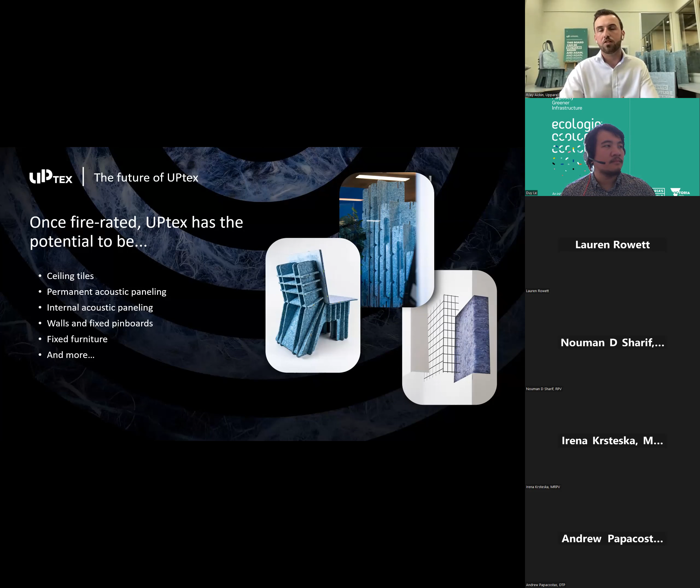If you'd like to use UPtex, it's imperative that you engage us in the early stages of your project, such as the design phase, so that designers and engineers can understand and spec this sustainable alternative to traditional materials, and so that we can deliver UPtex that is suited to your needs. More UPtex in circulation means less textile waste going to landfill, so please get in contact via our website so we can work together on your next project and support the circular economy.

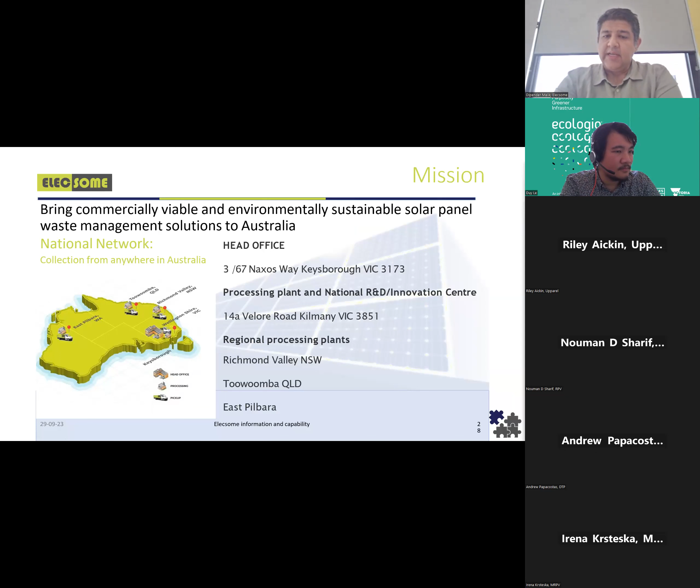So this is the roadmap for Elecsome. Right now we've got the first plant coming up in Kilmany, which is going to be an R&D and innovation center. But we are already in the process of finalizing land in a few other states so that we can have a better network of collecting all the end of life and damaged panels, so they can be reprocessed and the material can be used in a better way and be a part of sustainability and a circular economy. So these are the proposed locations where the plants are going to come in.

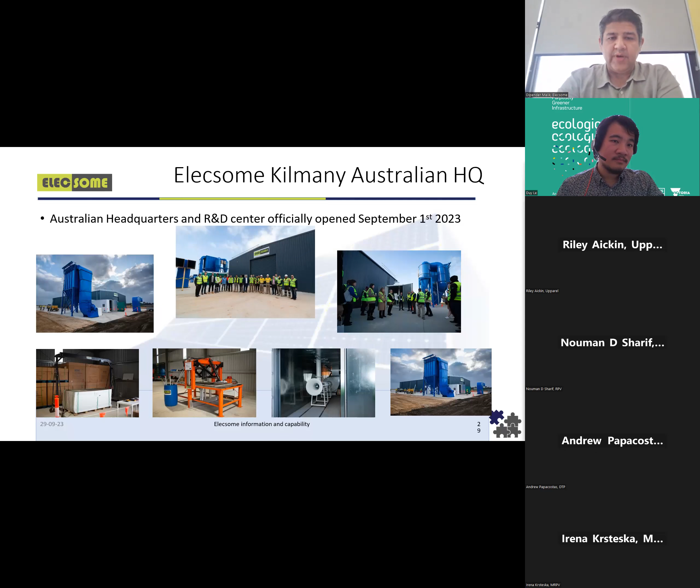In the background, the big blue machine is a vortex system. We put in the solar panels, and it works on a pressure, shockwave, and cavitation process, disintegrating the glass on the solar panels into a fine glass grade sand, which could be used in concrete production or a pre-mix concrete plant. This is the first part of our plant, but in the coming months we are putting up our own dry mixing batching plant as well, which will be producing pre-mix concrete bags for the community. Next slide, please.

In the whole journey for Elecsome, we have partnered with RMIT as well as the University of Melbourne, who have done our initial testing for the product and also for the concrete mixes we should be running.

During this process of putting up the plant, the whole process is around creating local jobs as well, because the region where we are putting up the plant is the same region where all the thermal power plants are coming down. We can get a lot of people who have worked around those plants, and we are trying to re-employ them in our business and train them to be a part of the Elecsome journey.

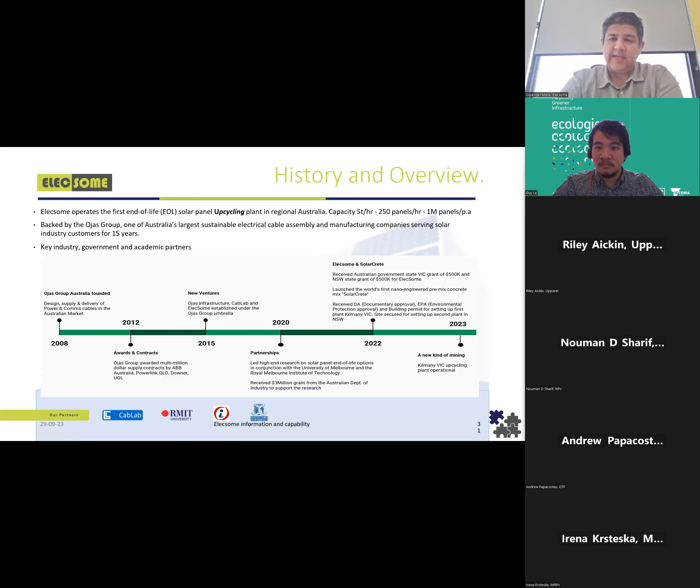There is nothing at this stage being done for end of life or damaged solar panels. Most of them used to go to landfill, or only the aluminium that forms the frame of the solar panel was taken out. The rest was just stored in containers or warehouses. Next slide, please.

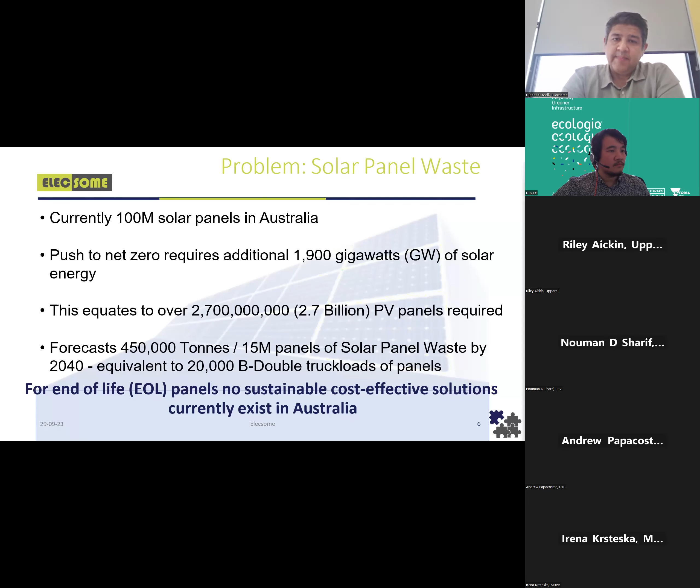How Elecsome comes in is we will have nationwide collection points in every state, and we will transport those panels to various locations where we can upcycle them. Only the Kilmany site in Victoria would have a dry mixing batching plant, where we could produce Solarcrete as a bagged product for the community as well. Next slide, please.

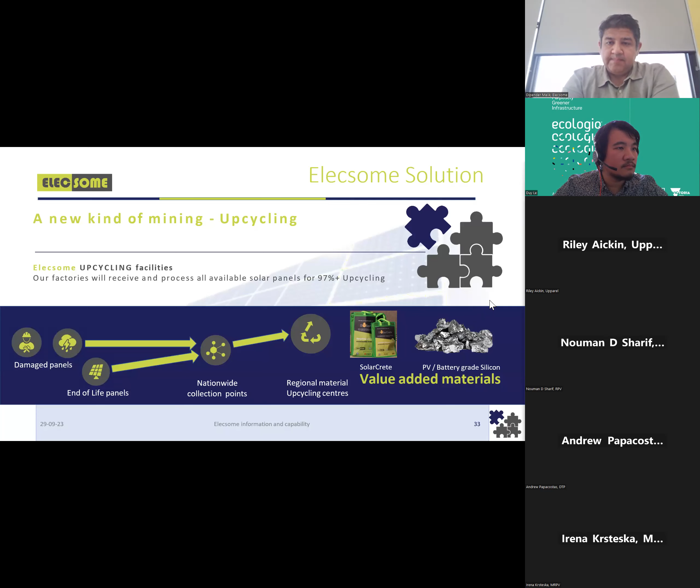At this stage we are in an R&D process with RMIT, looking at a chemical separation process where the solar panel is dipped into an ionic liquid so the glass separates from the panel. We can run this glass through the vortex system to convert it into glass grade sand, and through the chemical process we can recover copper, silver, which are high value items, and silicon from the panels. Most probably in a year's time we'll have a second warehouse at the same facility to start the commercial process there. Next slide, please.

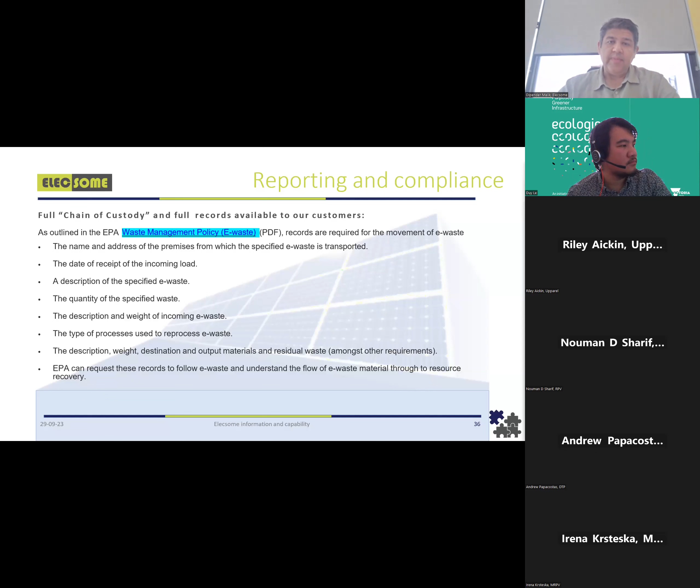Because we have a lot of contracts coming through from solar farms, this is the whole e-waste process, where we've got a waste management policy. We scan each and every panel coming through the gate and record what has been done with it. We have solid quality assurance that panels coming from solar farms or end of life are not ending up in landfill, and what they have been used for. That's the waste management policy for Elecsome, which is already in place. Next slide, please.

And then we will be having the full custody reporting for EPA requirements for any big project: how many panels have been received, how they have been recycled and how the material has been used. Next slide.

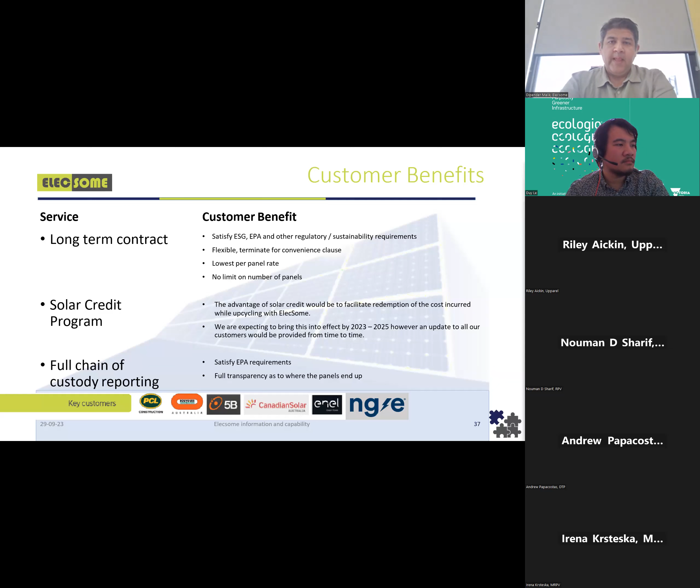And the first part is, at the facility right now as well, we test each and every panel which comes through the gate, whether it could be reused. So you can see these pictures when we are processing and looking into the panels. Whichever are the good panels, we are already installing at our site to have our own power generation through a small solar farm installed at the site.

Next slide, please. This is the team involved in the whole journey for Elecsome, which started from 2020 to 2023. Yeah. Next slide. Yep. Thank you.

Thank you, Dipender. Yeah, I'll open up with Nouman. I think fastest there. Thank you. I want to hijack this conversation with the question and answers, but a couple of things, Dipender. Thank you first for presenting. Yeah.

Now, solar panels are, of course, a piece of technology, and there will be technological updates happening. Assuming that for the next 5-10 years or whatever time period, you've got the supply of existing solar panels available in the market, which have been used on projects, etc. So one thing to think of is, of course, the future proofing of your company and the products that you'll be able to produce.

The other thing I'd like to mention is what we've experienced with a lot of infrastructure projects: if they are in regional areas, the supply of such products typically becomes an issue because of the distance. If you're saving on one aspect, then the transportation costs are too high, or your carbon emissions because of transport are too high. Hence, the product isn't feasible anymore. So that's just another food for thought, to strategically place your manufacturing facilities in places where you have that pipeline of projects.

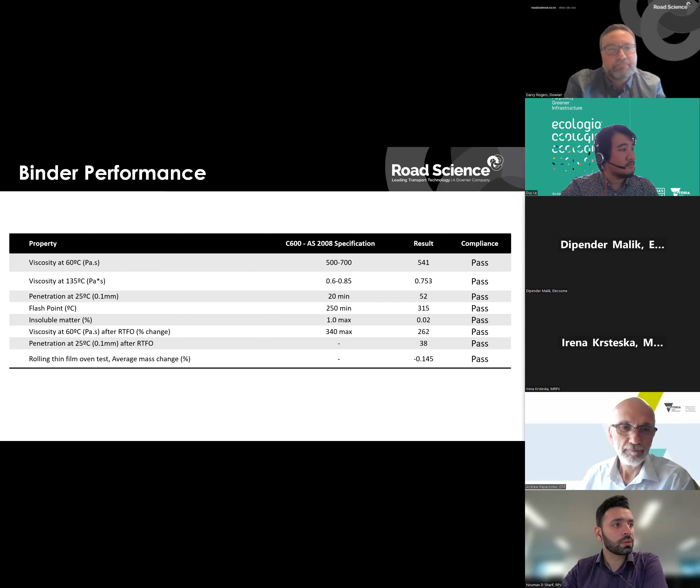In terms of asphalt performance, it essentially gives us very similar performance in terms of rut resistance. There's two tests we focus on in terms of looking at how it performs when it goes into an asphalt mix. One of them being rut resistance, so that's essentially having a loaded wheel pass over the mix we've created, and measuring how deep that deformation occurs over time. So the higher the result there, the worse performing it is.

In terms of fatigue resistance, I kind of consider fatigue resistance to be, I call it the plastic ruler test. So you think about if you're at high school, you had a plastic ruler sitting there a bit bored in class, you bend it many times, this thing snaps. We kind of test the same thing with asphalt. So if you put a layer of asphalt down on the road, vehicles are going to drive over top of it, it's going to flex that layer of asphalt, and eventually it will start to crack and break.

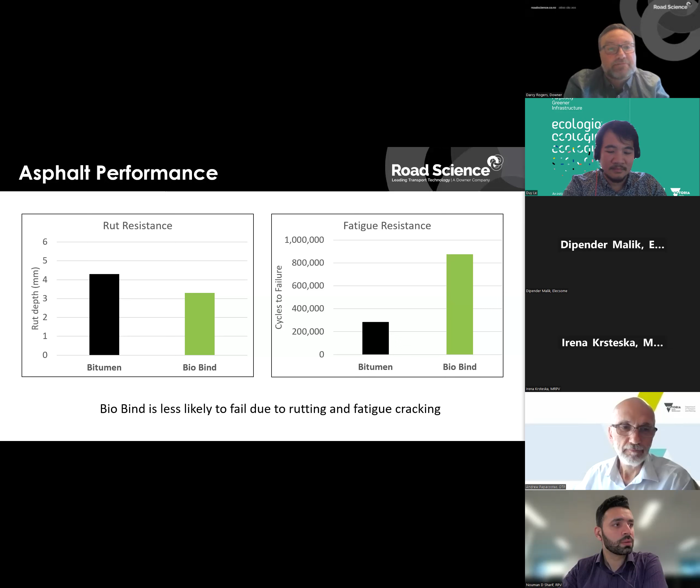In terms of carbon emissions, so I'm not sure why I keep skipping. There we go. That's all right.

Obviously, it's something we're still working on to finalise and get a proper EPD sorted. Based on our initial internal analysis, a ton of biobind would offset roughly around 2 to 3 tons of bitumen. So one of the key things in here, we're trying to pick raw materials that act like carbon sequestering agents, where it actually captures carbon through the growth of that plant material. And then we're using that waste to actually produce our binder. So these are subject to change, but just to give you a rough idea of where we're sitting in terms of reduction in carbon emissions, we'll be offsetting 2 to 3 tons of bitumen for every ton of biobind we use.

Obviously, it being a very new material, there's also some health and safety concerns that go along with it. We have completed leachate and fume testing with it. And I guess the key thing for the Road Science brand is, we've got some really smart people who can develop materials, but we also have some really smart people that can grow and implement these materials into the field and actually test how they work in reality. So we recently conducted a full-scale trial using this material, and we got the opportunity there to capture the fume testing data.

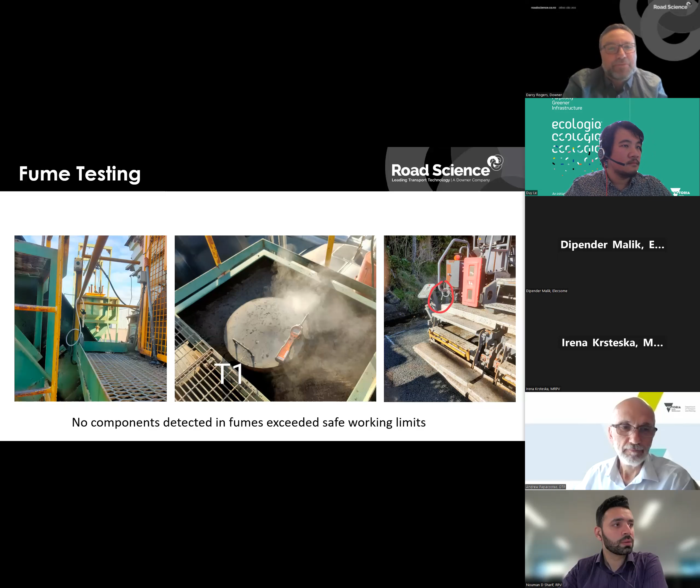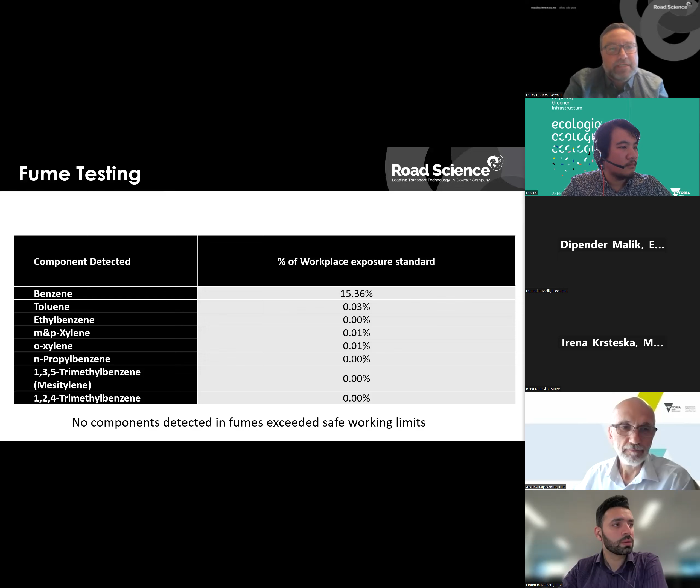So what we could see here are all the things we could detect. Some of them were well below the detection limits, but the highest one there we could see was at 15%. So still much lower than the workplace exposure standard. So we can consider this to be quite safe, and probably in some cases a little bit better than bitumen as well.

So once we'd satisfied ourselves about the fume testing, and also the leachates gave us the same results, there was nothing coming off. In that sense, we were able to take it to a full-scale trial. So it's just in October of this year. It was only a couple of months ago. We were able to go pave a section of road in New Plymouth in New Zealand. And in terms of just testing this out and making sure that what we've developed in the lab and what we're seeing in the lab is going to be replicated in the field. And this gives us the opportunity as well to monitor the site.

So, like I said before, we want to get using this material. So then when we have to make the change, we've got some really good data sets there to be able to prove that what we're doing at the moment is the right thing to be doing long term. So this section of road has about 20,000 vehicles per day on it, and about 4% of that are heavy vehicles. So it was a good test for it. In this case, we're just replacing the top 50 mils of the asphalt. So it's kind of considered to be a thin surfacing.

Go to the next one there, Duy. I guess the feedback we had from the crew and the QA results was that it just behaved like standard asphalt. We've managed to meet the same bitumen performance criteria. So when the team were putting it through the asphalt, laying and compacting it, they couldn't really tell the difference from standard bitumen. The only thing they raised was that it smelled different. If these guys are working with this every day, they can pick up any small changes as well. So it certainly smells different, but everything else behaved like a standard asphalt.